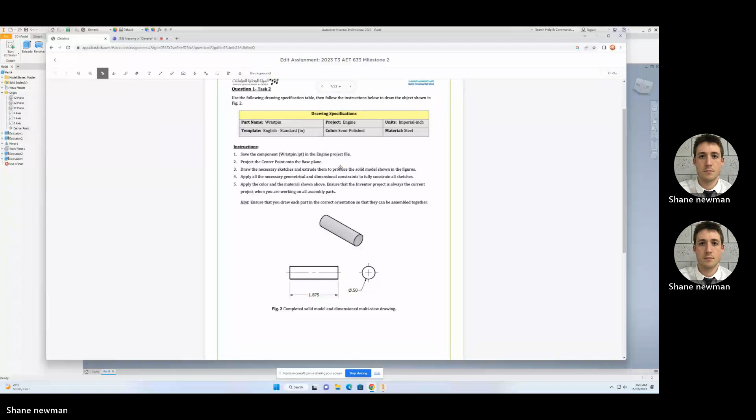So next part 2 here, or question 1, task 2. It's a very simple wrist pin. It's just a metal shaft. Again, we're going to use inches, and we're going to do one single sketch and an extrude, and that should be fine for that part. So again, we go File, New, make sure it's English, Standard IN.

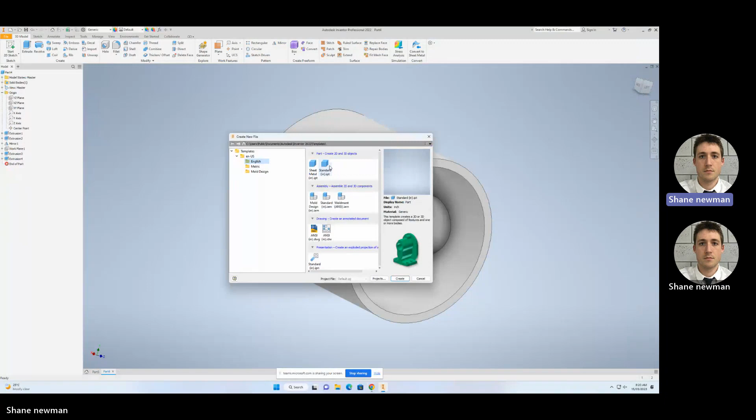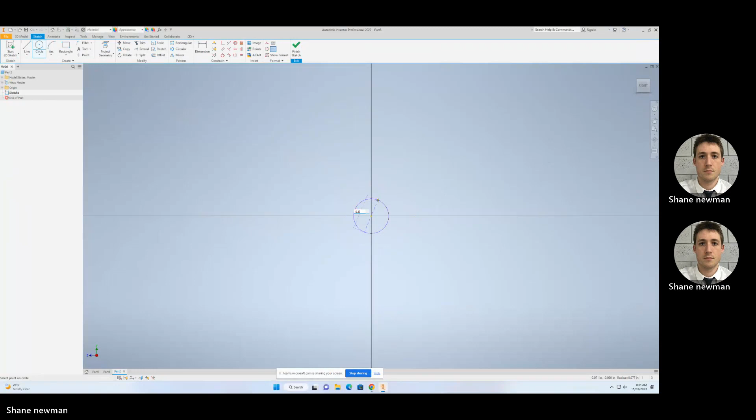This time we're going to do a sketch on, again, the side plane, same plane as last time. And we're going to do a sketch of diameter 0.5. Then we're going to extrude that. Distance of 1.875.

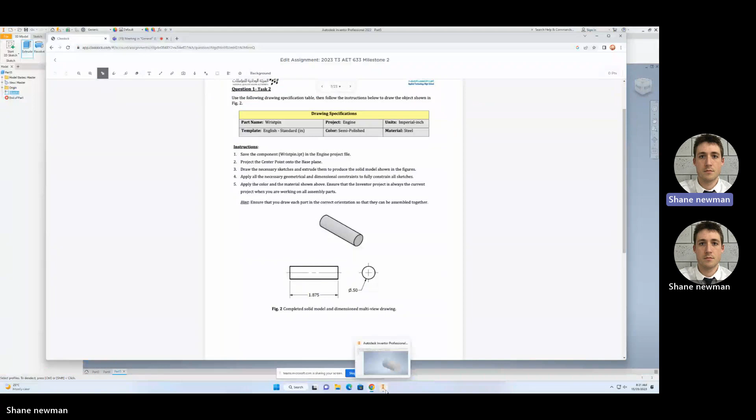Make sure we're saving these properly. So I'm going to File, Save As. And again, if I don't have a specific folder for this, I should make one. So I'm going to show you how to do that. Right click, click New, click Folder. This is going to be milestone 2.

So then when I'm back here and I click File, I click Save As, I can click into milestone 2, and this is going to be part 2, wrist pin.

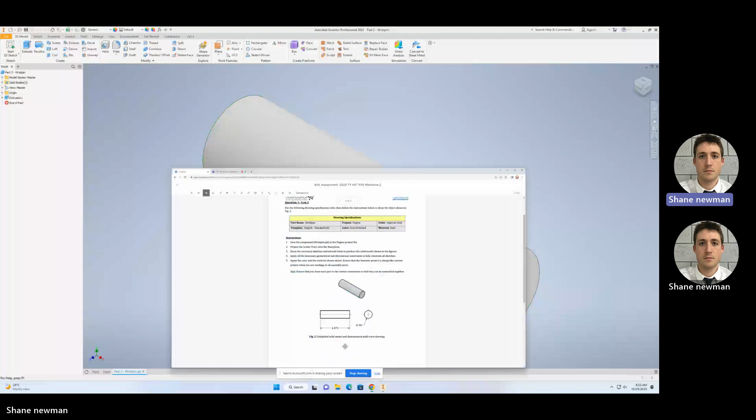So the next part that we're going to do is part 3 here, task 3, should I say. Again, it's inches, and it's called a piston case. So let's get started on this object. We're going to start with a rectangular block, overall size, and then we'll start taking pieces off it. So we know the overall height of the object is 3 inches. The overall width of the object is 2.25.

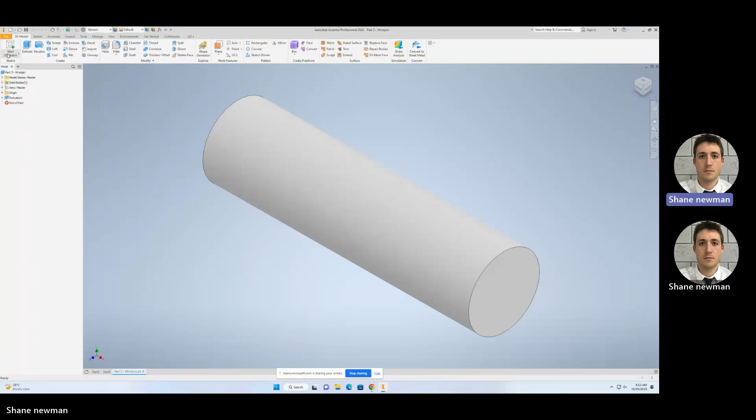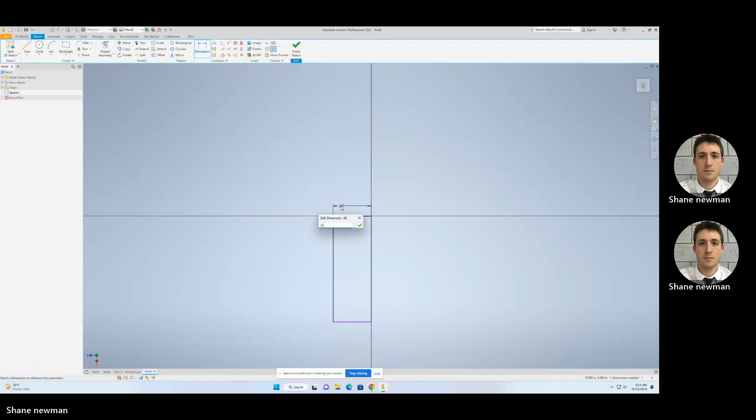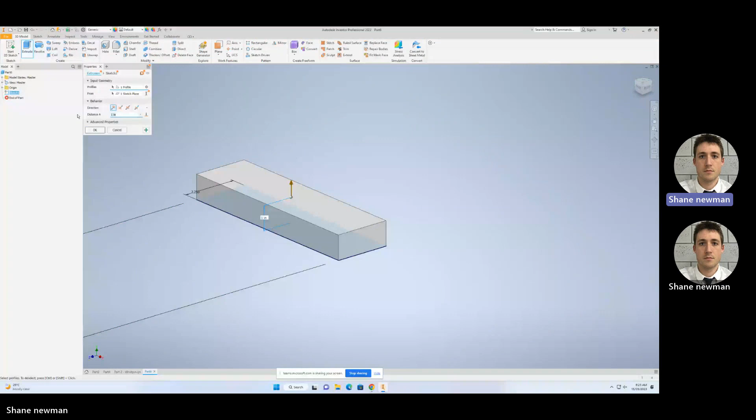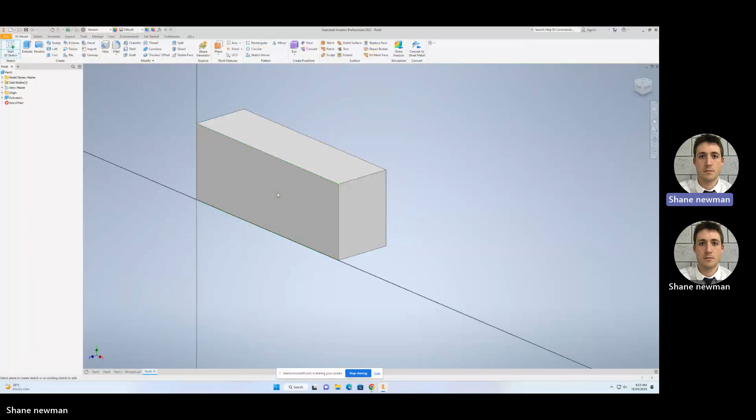And now I need to start taking pieces of material off this. So the first thing we can do is we can remove this section underneath here. So I'm going to sketch on this surface. We know it's a rectangle that I need to remove. The size of the rectangle we can see from here. We know that distance from this edge to this edge is 2.75. Here to here is 2.75.

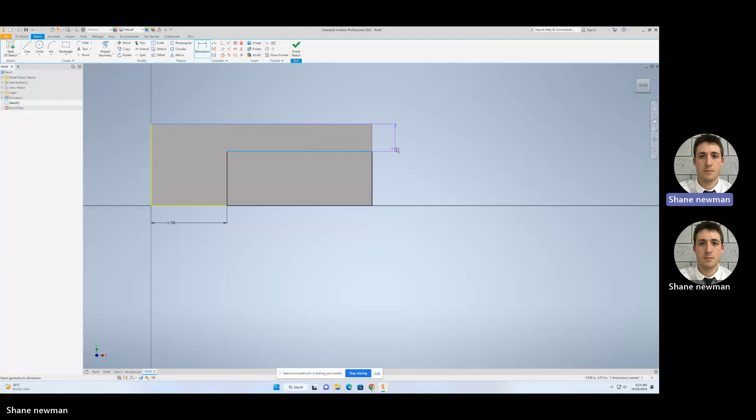Sorry, the other way around. My apologies. So we dimension from here to here, 2.75. So be careful of that. From the line here to the other side is 2.75. The height here to here, we don't know, but we do know from the top to this edge is 0.75. So we can go from the top edge to here, 0.75. I can go ahead and extrude that, extrude cut.

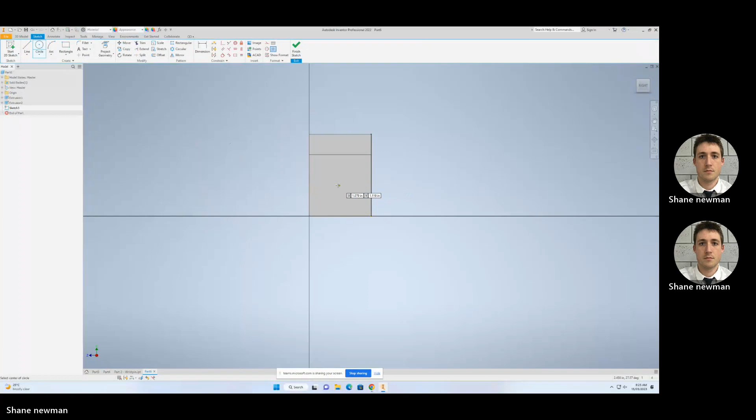There we have it. The next thing we need to remove is the circular part through here. So again, I'm going to sketch on there, and we know it's a diameter 2 hole that's running all the way through. So I'm going to do a sketch on this surface. Take a circle. Try and link it to the centers if you can. Then you can dimension that to make sure it's in the center.

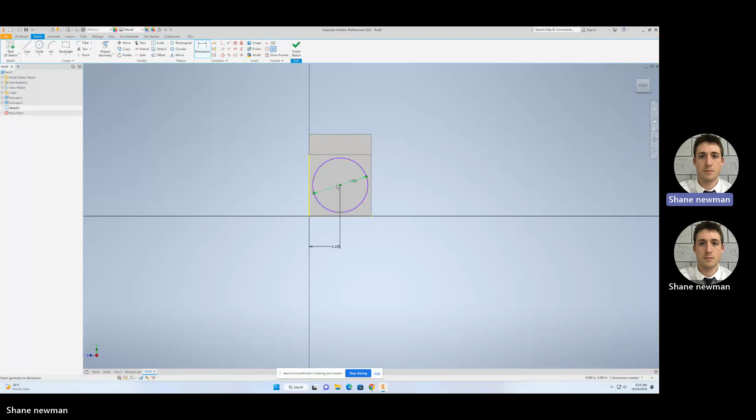Now we know that is 1.125 to the center, which is what we have right there. And then we also know the height of it is 1.125 as well. So we can take the center to the edge, make that 1.125. There we have it. Now it's black, it's fully defined. We can extrude cut that. Make sure it's going all the way through. There we have that piece almost finished.

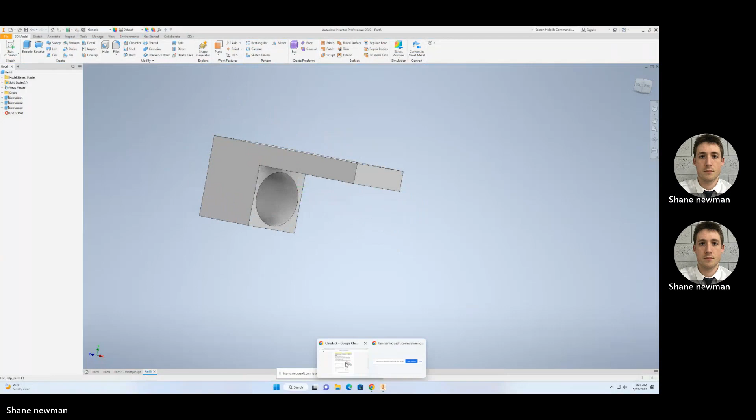Next thing we need to do is remove this section up here, and we can do that in one sketch. We can take the hole and the outer section in one sketch. So let's try that. So we can sketch on this surface up here. We're going to add a hole along the center line, like so. We know that this hole is a distance of 6.875 from the opposite side. So from here to here, it's 6.875.

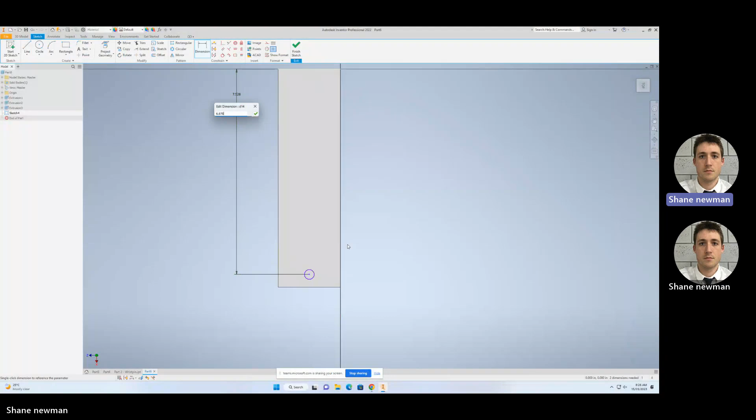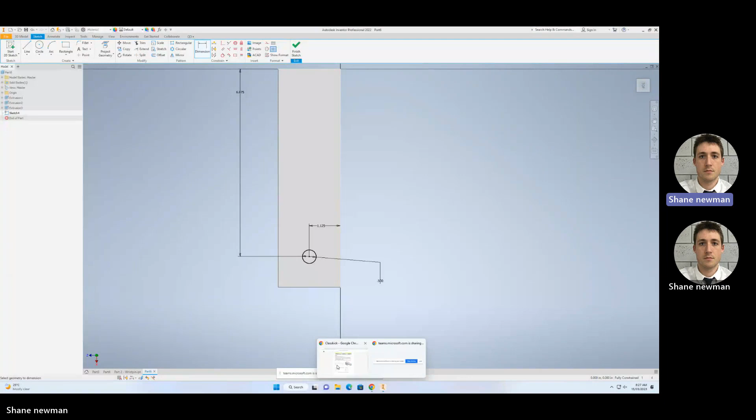We can add this side dimension as well to be sure that it's in the center. We know that half of this would be half of 2.25, which would be 1.125, which is what we have there. Now we just need the size of that hole, which is diameter 0.5, like so. And then we can add in the other removed part here as well. Now this one is radius 1.125, but it's the same center.

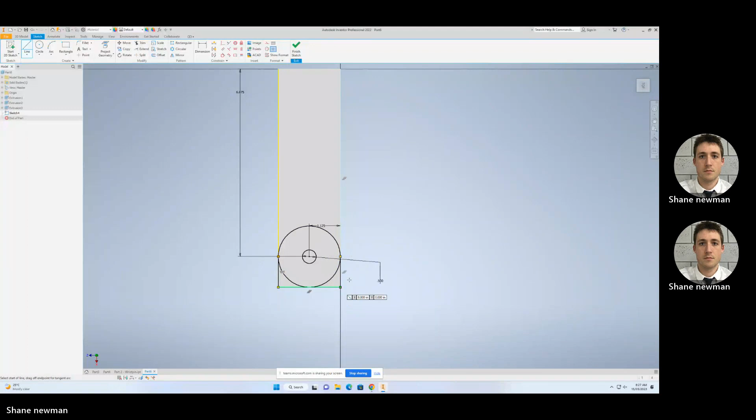So if I start a circle here and I extend to the line, this should be the correct size, which it is. I can then add tangent lines to the corners. Like so. When I go to extrude cut this, I can select the hole and these two sections here, but I'm going to select the cut function, which will remove all of that material. Now we're left with the finished part here.

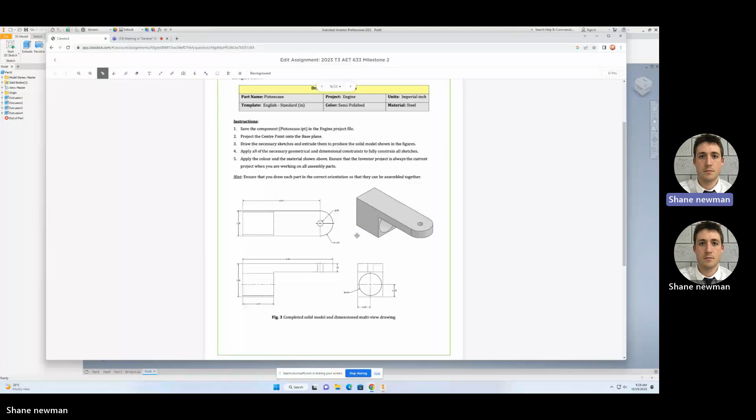So then we can go ahead and save that file, save as part 3. This is called the piston case. Save.